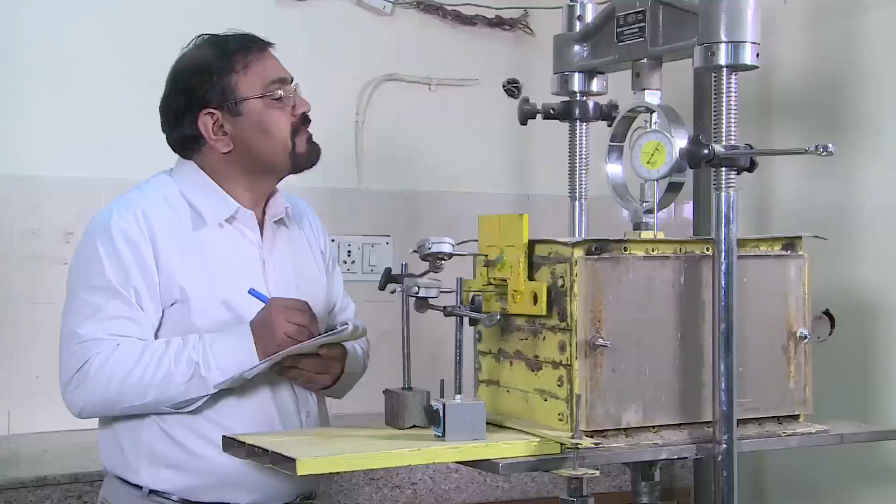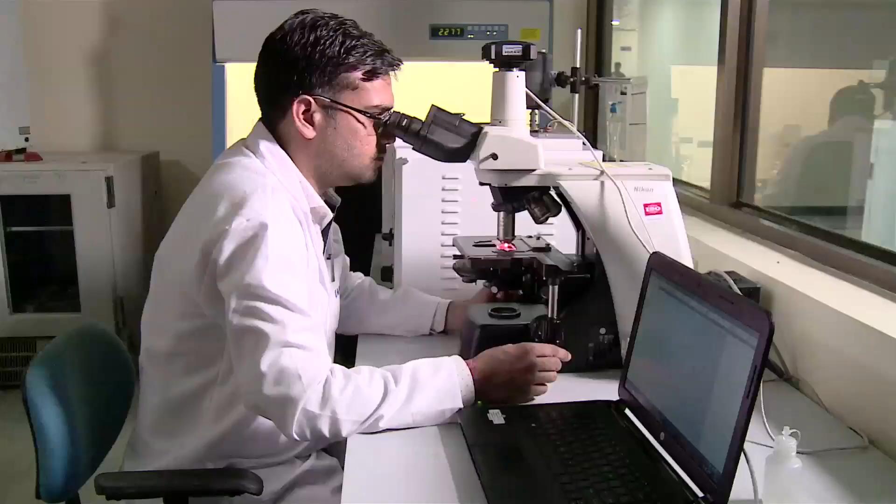To match pace with the advanced economies, it is very important for any nation to become science and technology sufficient. Keeping this in view, the Council of Scientific and Industrial Research, one of the premier scientific and industrial research organizations in the country, provided blueprints to establish a chain of research laboratories under its umbrella even before independence.

Central Road Research Institute, popularly known as CRRI, is one of these research laboratories, the genesis of which was thought of in the pre-independence period. The recommendation to establish Central Road Research Institute was accorded by the Industrial Research Planning Committee of CSIR in 1945. It was the efforts of Sir Shanti Swarup Bhatnagar, the then director of the Council of Scientific and Industrial Research.

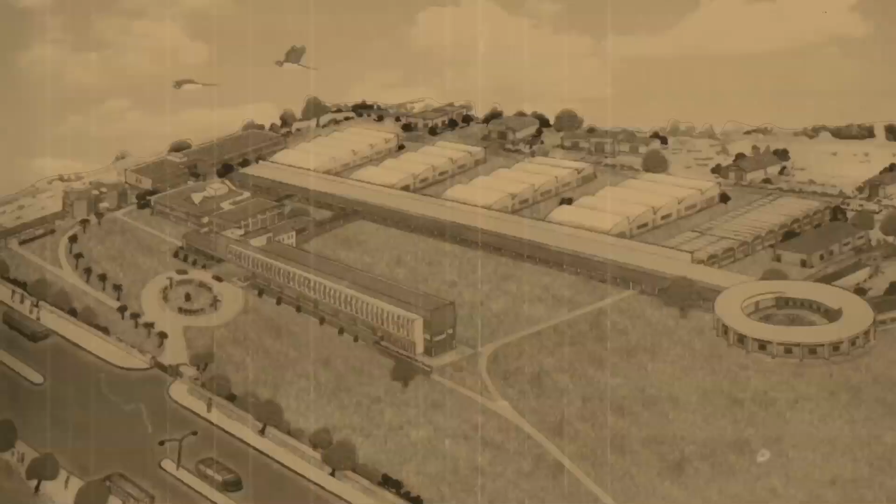And Mr. G.M. McElvey, consulting engineer to the Government of India, Roads, who suggested that the Central Road Research Institute be established in Delhi. Independence provided further impetus to this idea, and the Road Research Planning and Advisory Committee of CSIR considered the organizational and building requirements of the Central Road Research Institute, which was by then working in a temporary building.

Construction at the site of the present-day building at Mathura Road started way back in February 1951, with about 31 acres of land allotted to the laboratory. The building was inaugurated on the 16th of July 1952 by the then Prime Minister of the country, in the presence of scientific and political leadership, including Sir Shanti Swarup Bhatnagar and the founding director of CRRI.

Dr. Ernst Zipkes. CRRI was set up in 1950 with a mandate of conducting fundamental and applied research on highway materials. We have earned a reputation of being a solution provider to the field engineers on various problems being faced by them in the field. CRRI has taken up several projects of national importance in the past.

The Institute was the first to demonstrate the bulk utilization of fly ash in road construction. Quality control was also introduced by CRRI in 1962, and our scientists developed a mobile laboratory equipped with all facilities required for testing of material in the field.

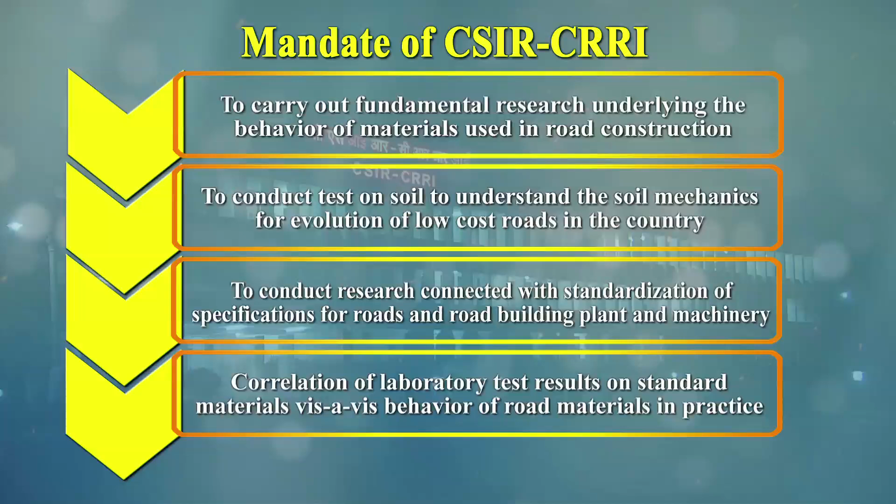CSIR CRRI was established with its mandate to carry out R&D activities in different research areas, which are well supported by infrastructural facilities and have been strengthened with the most modern equipment.

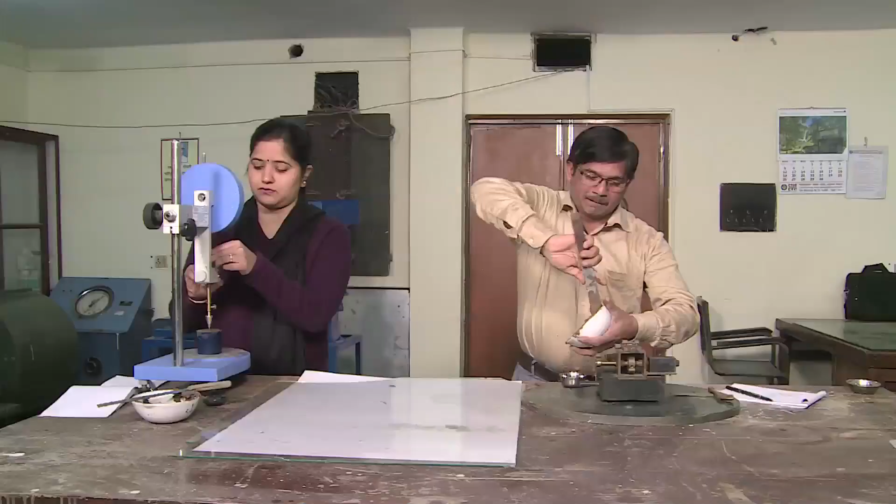This division is one of the oldest divisions of CRRI and has completed many complex and challenging projects sponsored by various agencies. Pioneering work was carried out regarding consolidation of marine clay deposits at various port areas of the country, and the efficacy of different ground improvement techniques was investigated.

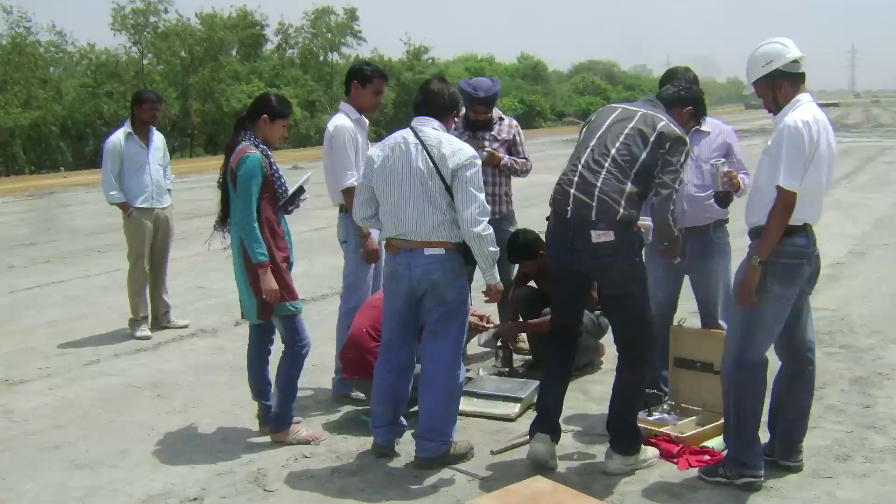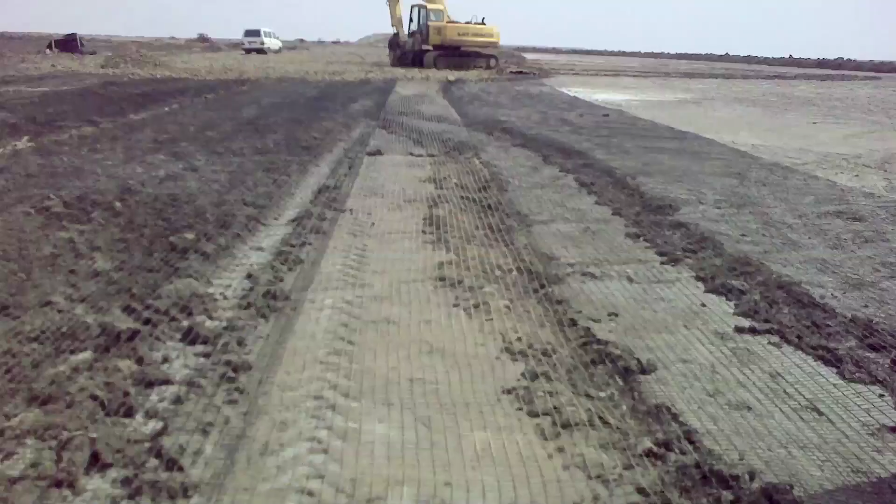Subsoil investigations and design of road embankments in strategically important areas have been done for different road construction agencies. The Geotechnical Engineering Division has been at the forefront to implement new technological developments like the use of geosynthetics, reinforced soil construction, etc.

In the recent past, R&D projects on soil nailing for implementing the box pushing technique for underpass construction, and failure analysis of reinforced approach embankments, have received special attention.

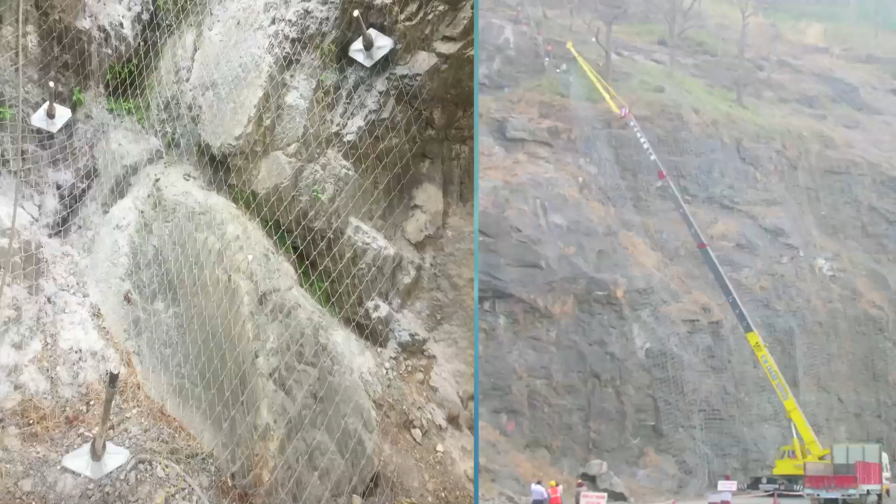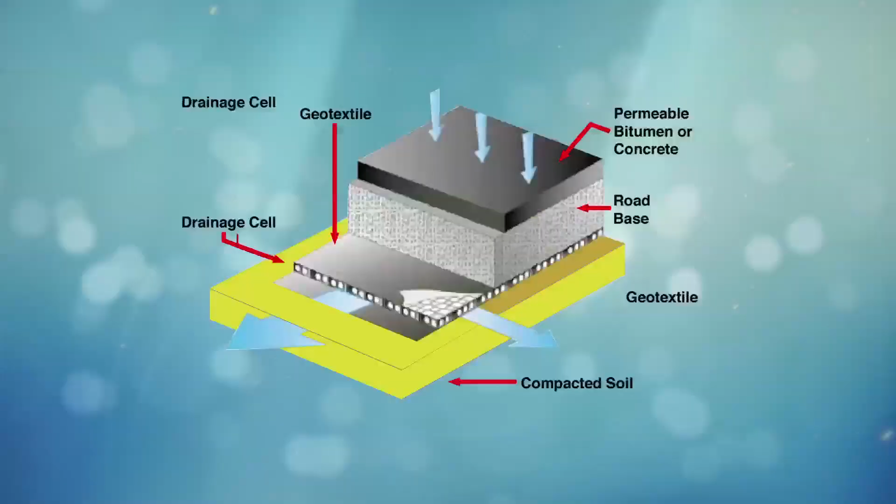This division has carried out extensive work on mitigation of landslides and management of hill slopes adjacent to roadways in mountainous areas. Some of the noteworthy contributions of CRRI include landslide and rockfall mitigation measures on the Mumbai-Pune Expressway, Zirakpur-Parwanoo Road, R&D on subsurface drainage technique, asphalt mulch technique, and use of coir or jute netting to prevent shallow landslides.

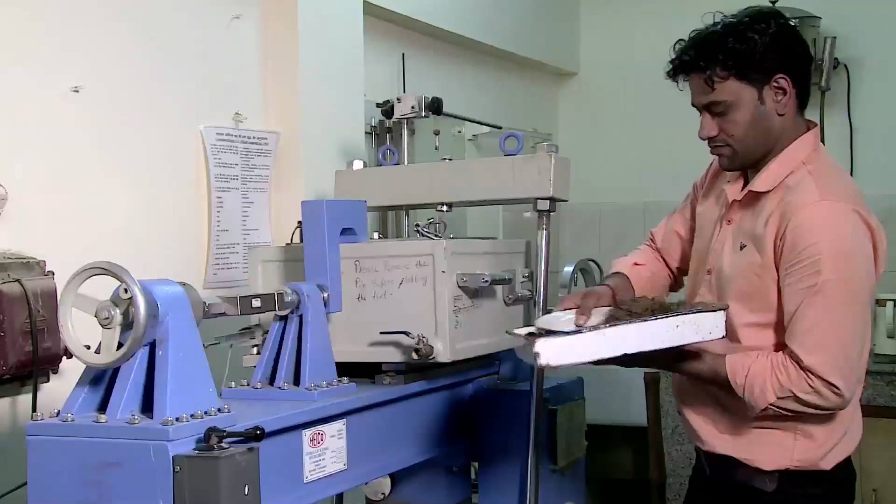The division has developed expertise on use of waste and marginal materials in roadworks. Extensive characterization and mechanical and chemical admixture stabilization of various waste materials like fly ash, copper slag, zinc slag, municipal wastes, jarofix has been done, and methodologies for utilizing these materials in roadworks have been developed.

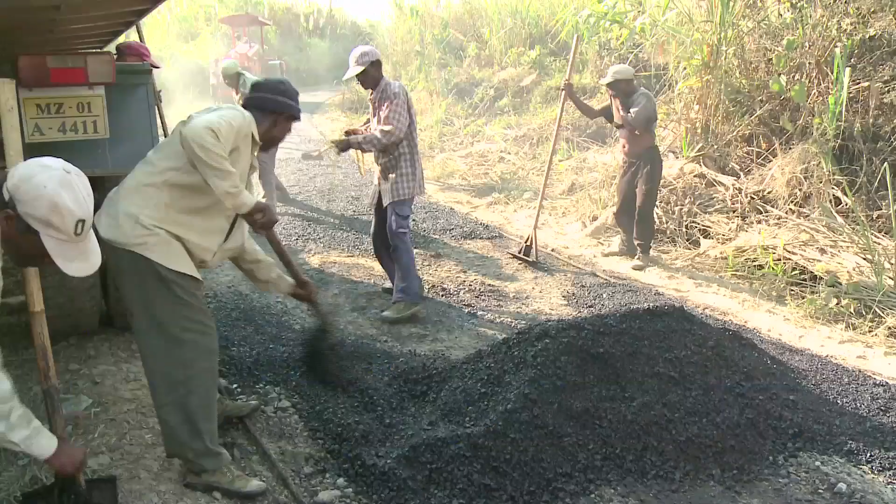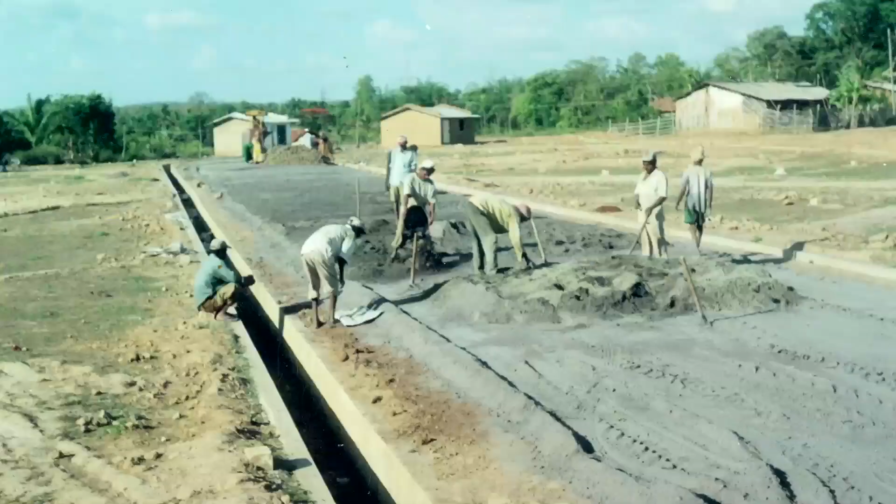Recently, this division has prepared a database of waste and marginal materials available in selected areas of the country on a GIS platform. This division has been acting as a specialist consultant and solution developer for the road construction industry in the area of geotechnical engineering, especially for subsoil problems, drainage and roadside slope-related issues, and waste and marginal materials.

In association with the Indian Roads Congress and Bureau of Indian Standards, it has contributed significantly towards formulation of several national codes of practice and guidelines. The R&D achievements of the Geotechnical Engineering Division have been well recognized through many awards received over the years.

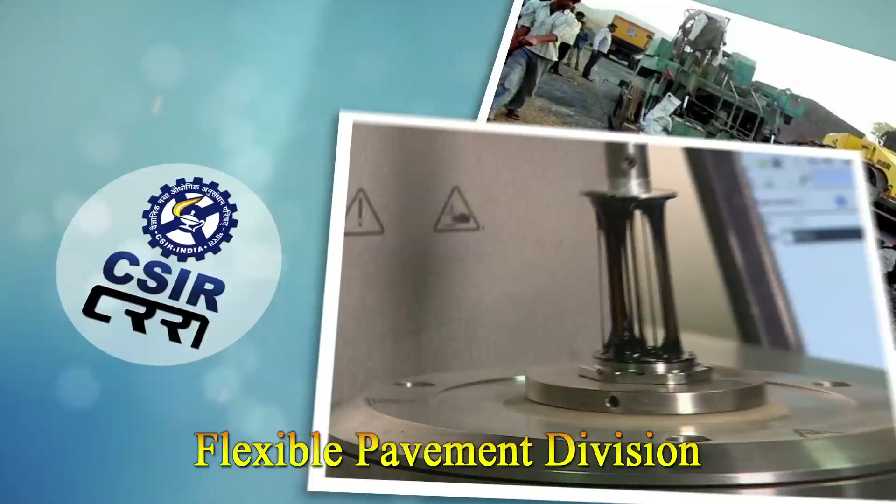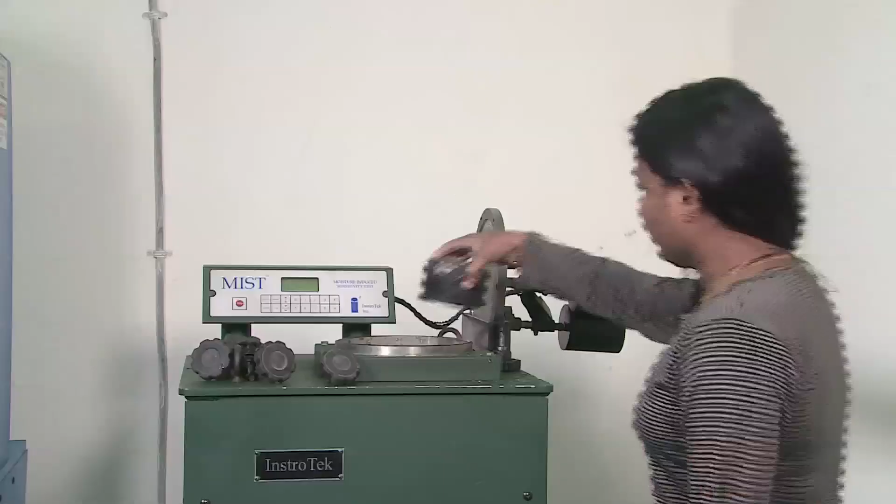The Flexible Pavement Division of the Institute is involved in research in the area of bituminous materials, their testing and evaluation. Research in bituminous pavement design, its failure investigations, design of overlay, recycling of bituminous pavements, warm mixes, etc. are carried out by the division.

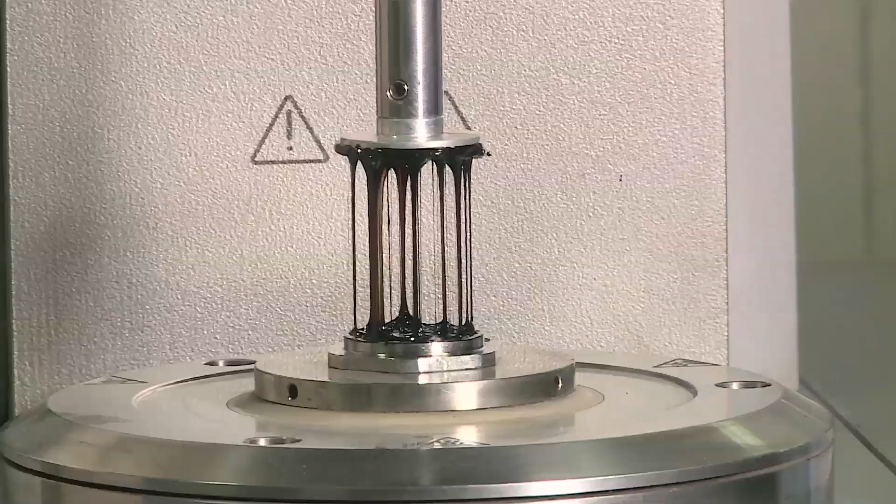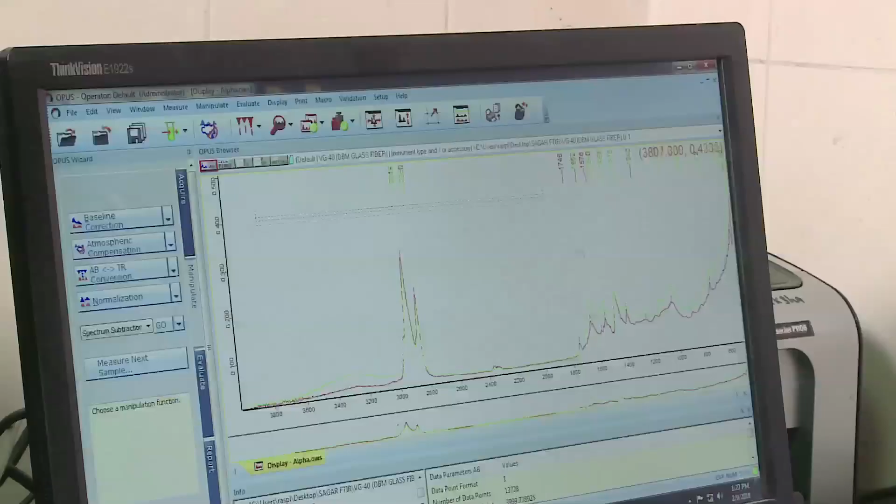The division has developed national guidelines for design of flexible pavement overlay using the Benkelman beam deflection method. Research has been carried out on use of polymer and rubber modified bitumen, multigrade bitumen, and guidelines have also been developed for use of appropriate grade of bitumen in different climate regions of the country. Laboratory evaluation and field demonstration have been carried out for use of waste plastic in bituminous roads.

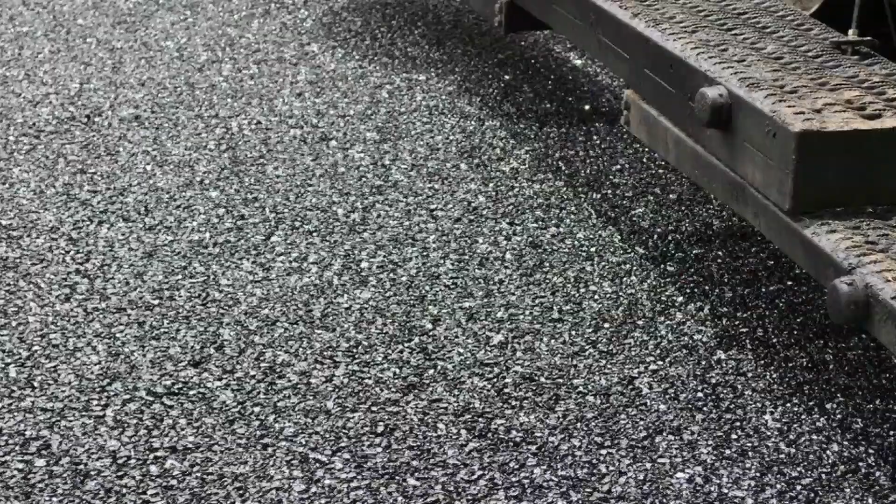R&D activities on use of recycled asphalt pavement and design and performance of microsurfacing for bituminous pavement have also been carried out in the division. The division is also engaged in designing and performance of stone matrix asphalt and use of cold mix technology for bituminous pavements. The division has acquired various testing facilities for flexible pavement.

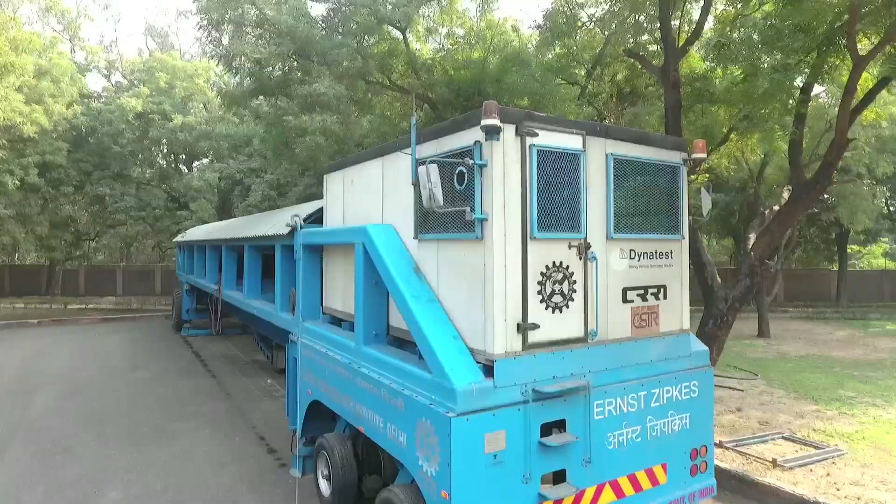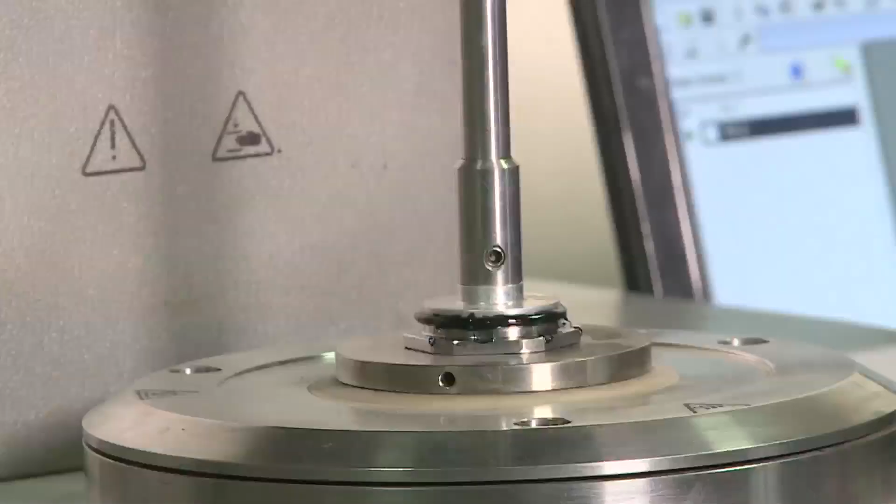Accelerated Pavement Testing Facility is used to get the long-term performance evaluation of the pavement. Universal Testing Machine is used to assess the strength properties of bituminous mixes and ascertain their behavior in the field. The division has facilities to evaluate resilient modulus, fatigue life, and indirect tensile strength of bituminous mixes. Dynamic shear rheometer checks the viscoelastic properties of bitumen at different temperatures.

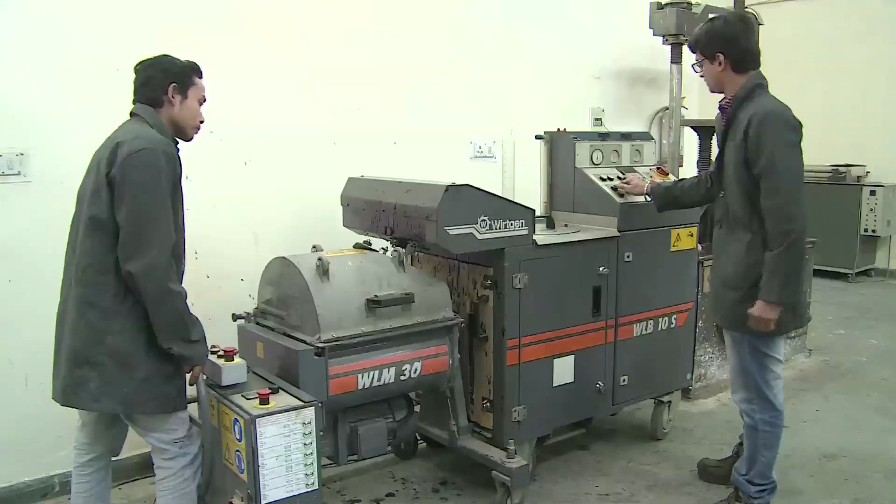Research work at the division is carried out to use reclaimed materials either in the bituminous layer or in the granular layer for recycling of pavement. CRRI has recently developed a pothole repairing machine which can be transported to the site to repair the pothole instantaneously.

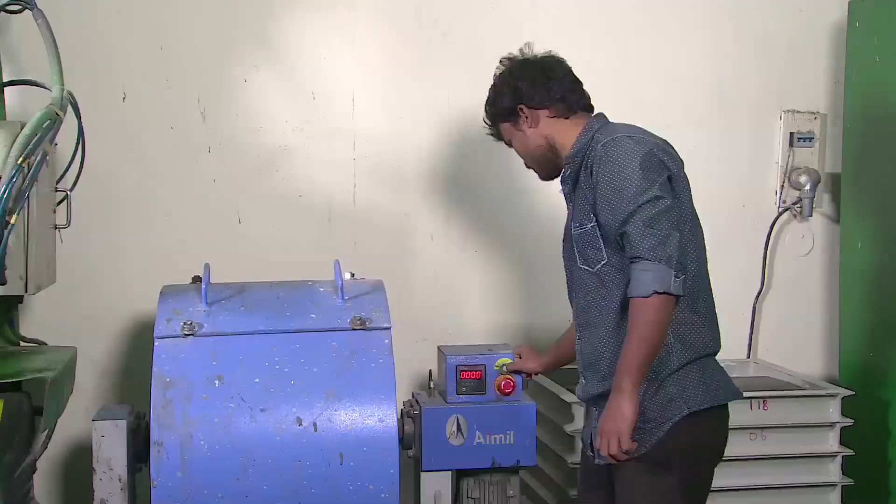The division is also associated with various agencies like NHAI, NRRDA, PWDs and border roads to provide consultancy services and to provide technical guidance for their problems. The division has received the CSIR Technology Award 2017 for the use of sustainable cold mix technology for bituminous road construction, and has contributed to the development of IRC and BIS codes.

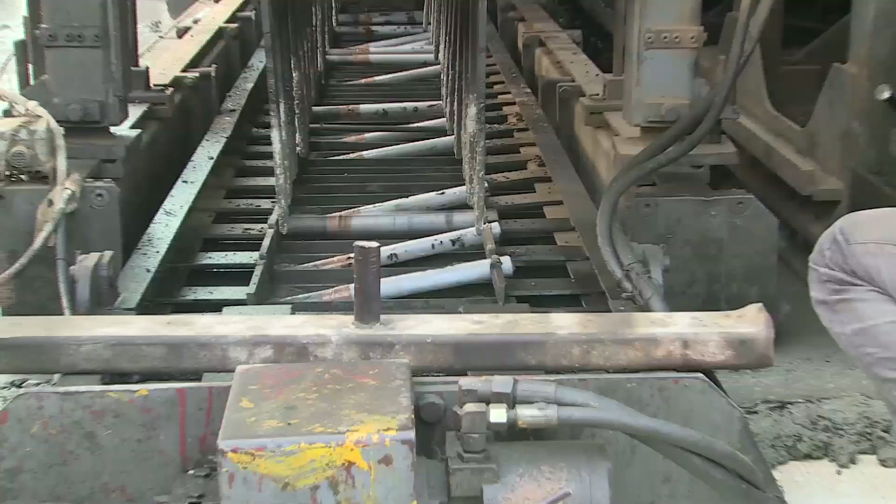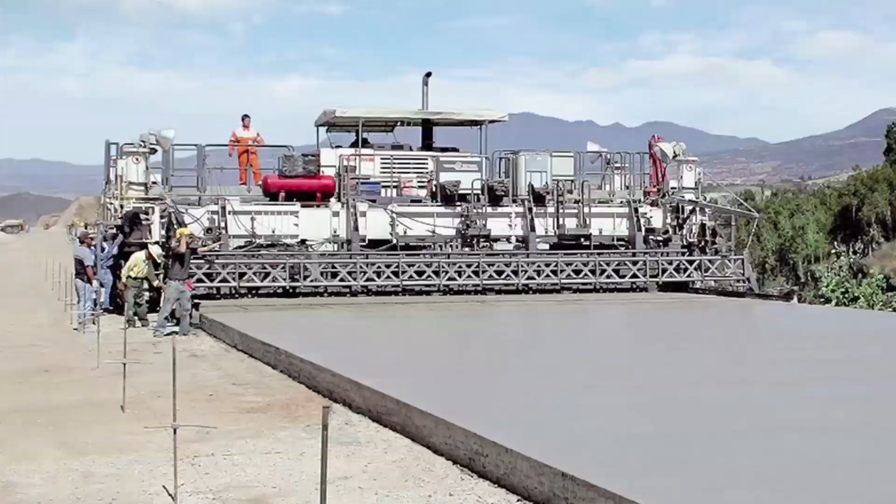The Rigid Pavement Division is involved in activities related to design, construction, evaluation and maintenance of jointed plain concrete pavement (JPCP), continuously reinforced concrete pavement (CRCP), white topping and other forms of rigid pavements, utilization of industrial wastes and byproducts in concrete road construction, instrumentation of rigid pavements, investigation of causes of distresses or failure and taking remedial measures, etc. The division has also contributed to the development of many IRC and BIS codes.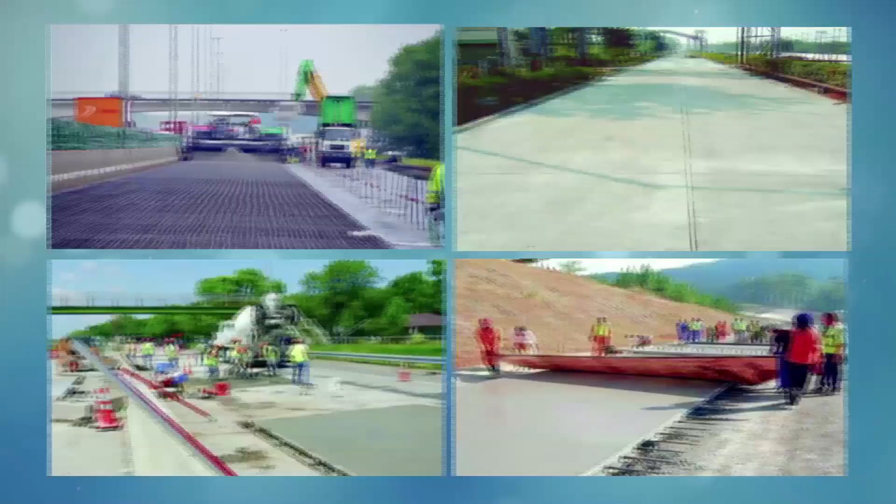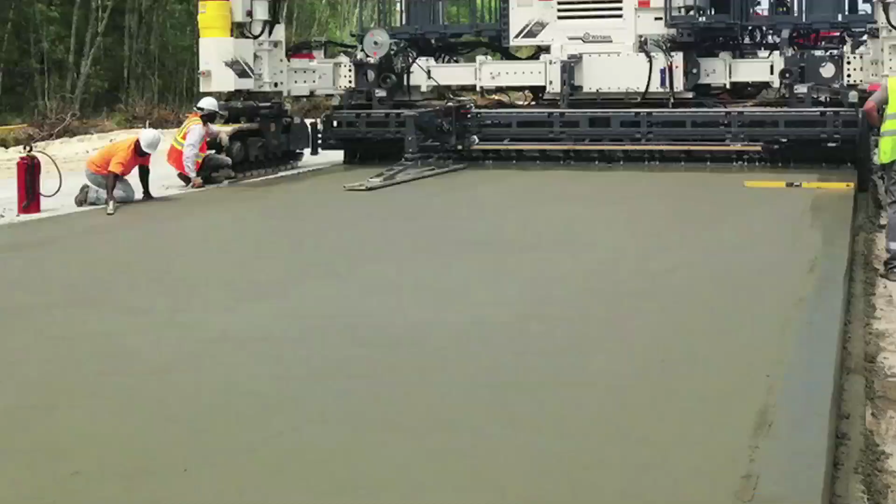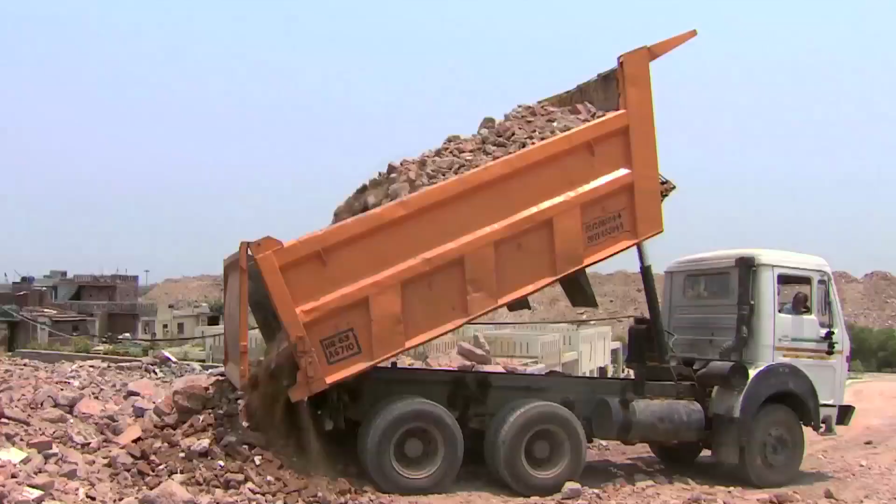Some of its landmark studies consist of utilization of high-volume fly ash concrete (HVFAC) for rigid pavement, white topping using high-performance concrete mixes for rehabilitation of existing asphalt pavement, roller compacted concrete pavement, use of synthetic fibers in concrete, use of industrial byproducts like fly ash, slags, marble slurry dust in concrete mixes, sand stabilization with magnesium oxychloride cement, utilization of copper and zinc slag as fine aggregates in concrete mixes, investigation and remedial measures for distressed concrete pavements, and utilization of recycled concrete aggregate and C&D waste for construction of concrete pavements.

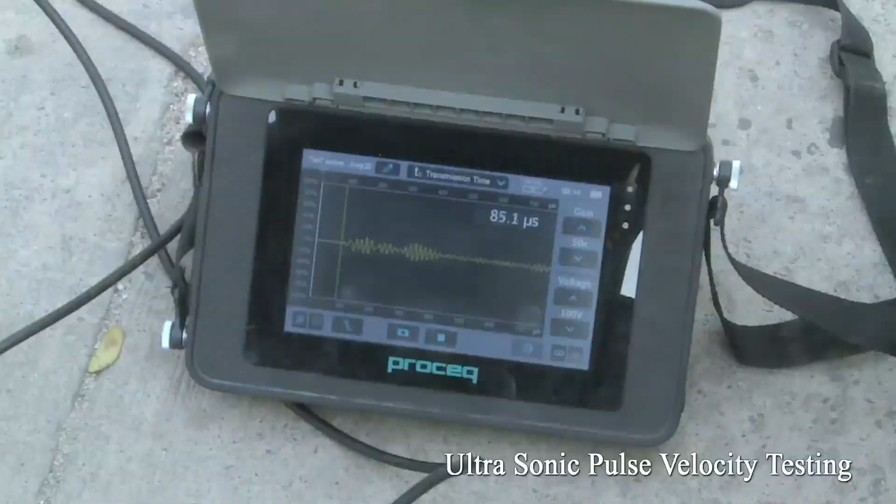The division is equipped with the most modern facilities needed for this purpose, such as universal testing machine, compression testing machine, concrete abrasion testing machine, concrete impact testing machine, diamond cutting machine, British pendulum tester, ultrasonic pulse velocity testing apparatus, and LOK and CAPO.

The major thrust areas of the Pavement Evaluation Division comprise pavement performance studies, structural and functional evaluation of highway and airport pavements, rehabilitation design of pavements, pavement deterioration modeling, pavement maintenance management system, road inventory and condition monitoring for road asset management, investigation of causes of distress or failures and needed remedial measures, and axle load studies for planning of maintenance and repair strategies.

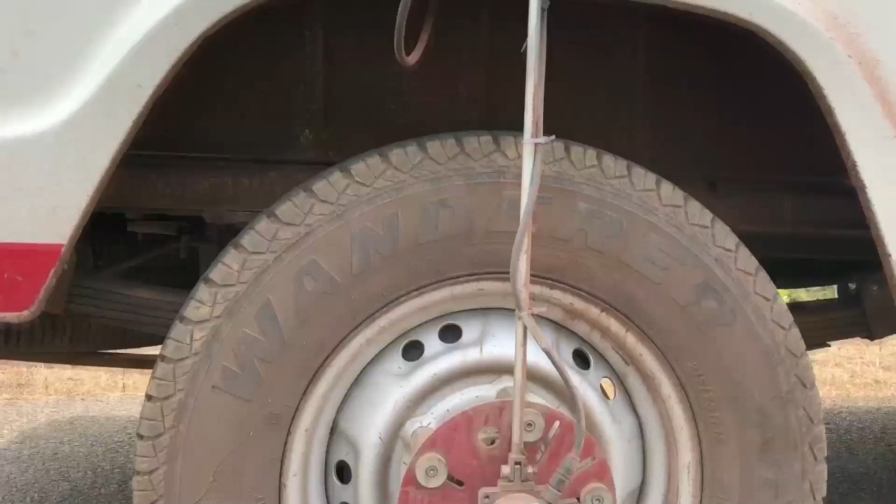CSIR-CRRI has successfully employed a state-of-the-art facility, namely Automated Road Survey System (ARSS), for conducting automatic road inventory and pavement condition survey throughout the country. This technology has been successfully used for the first time by CRRI under various research studies.

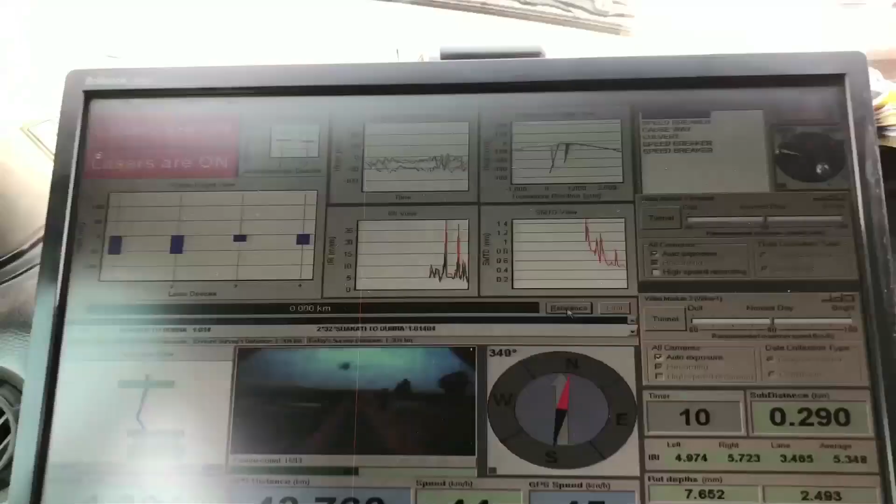Based on the latest techniques, ARSS utilizes laser technologies, differential global positioning system (DGPS), and video image processing tools, etc., and is capable of collecting field data automatically at traffic flow speed ranging from 30 km per hour to 100 km per hour. The falling weight deflectometer is used to evaluate the structural conditions of pavement.

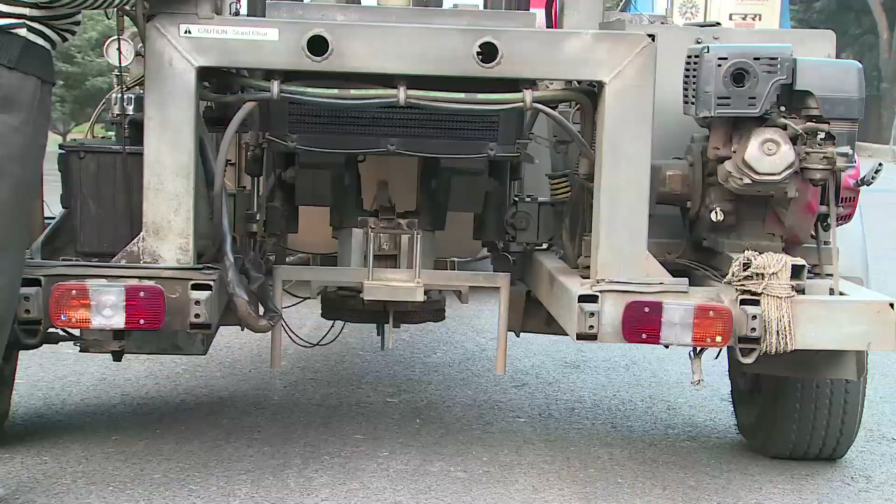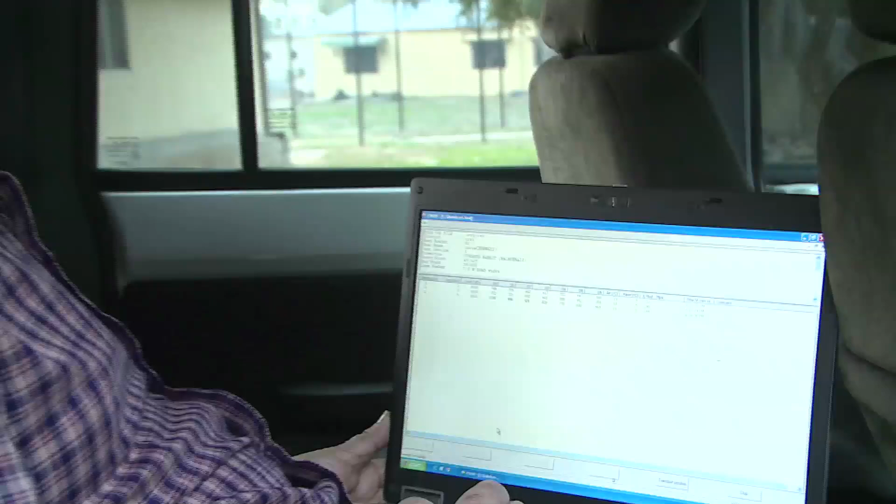The FWD is designed to impart a load pulse to the pavement surface, which simulates the load produced by a rolling vehicle wheel. FWD data is most often used to calculate stiffness-related parameters of a pavement structure.

Fifth Wheel Bump Integrator is indigenously developed by CSIR-CRRI and is used for roughness measurement of pavements. It is towed by a jeep at a constant speed of 32 km per hour. The walking profiler is a precision instrument designed to collect road surface profile data, and the dipstick is used to accurately assess the characteristics and quality of any continuous paved surface.

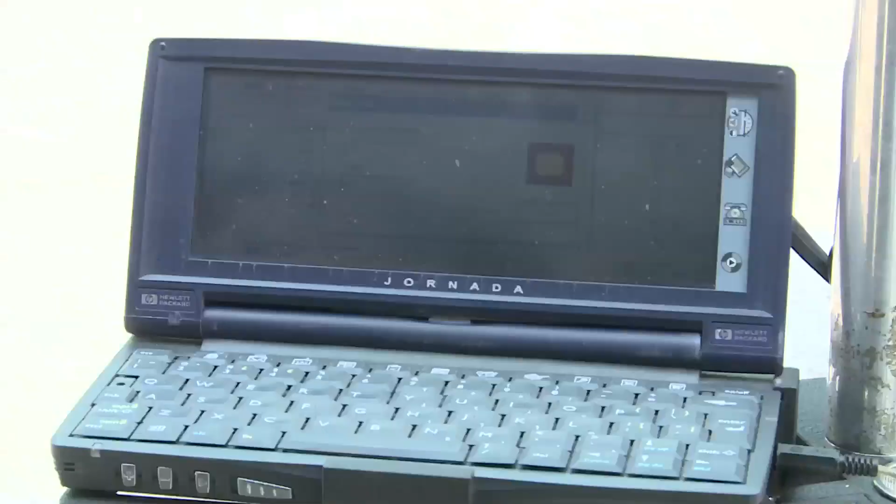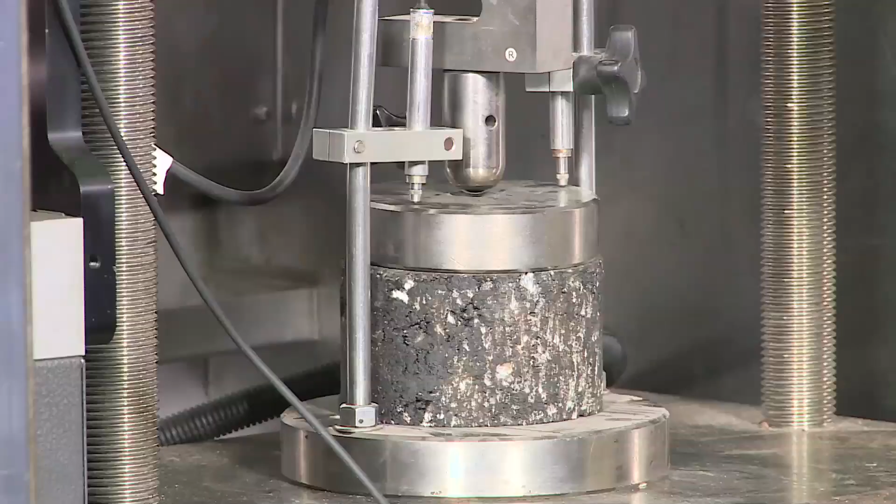The Institute has facilities for various performance testing on hot bituminous mixes. It uses a high-precision servo-pneumatic valve in conjunction with a low-friction actuator and sophisticated data acquisition, which results in finding out the performance of hot bituminous mixes.

In addition, the flexural fatigue test is used to characterize the fatigue life of hot bituminous mixes at intermediate pavement operating temperatures. It provides estimation of fatigue life of a bituminous layer under repeated traffic loading that causes fatigue failures. These failures ultimately result in fatigue cracking, which will cause disintegration of the pavement if not maintained in time. The Institute has also acquired the Asphalt Mixture Performance Tester, Steel Roller Compactor, and Bitumen Mixture Mixer.

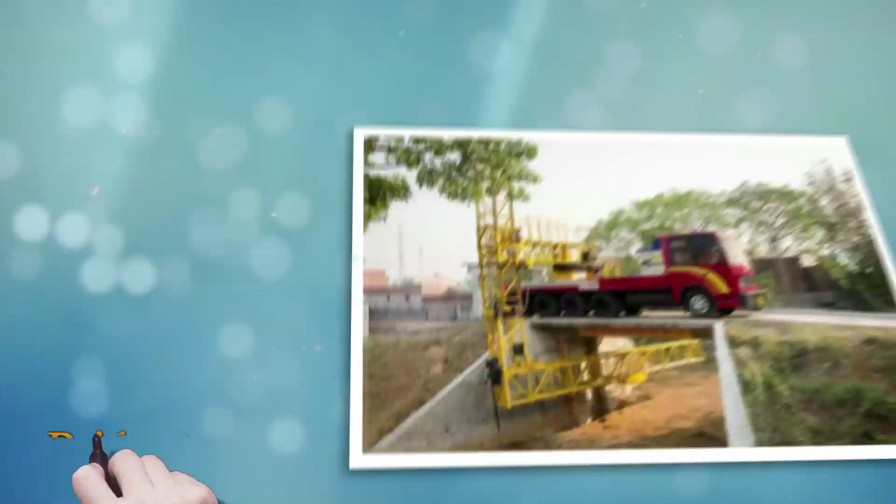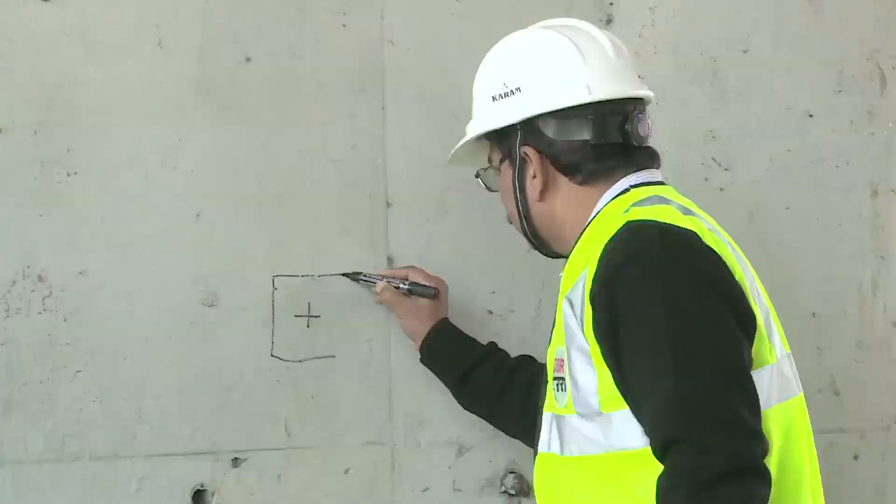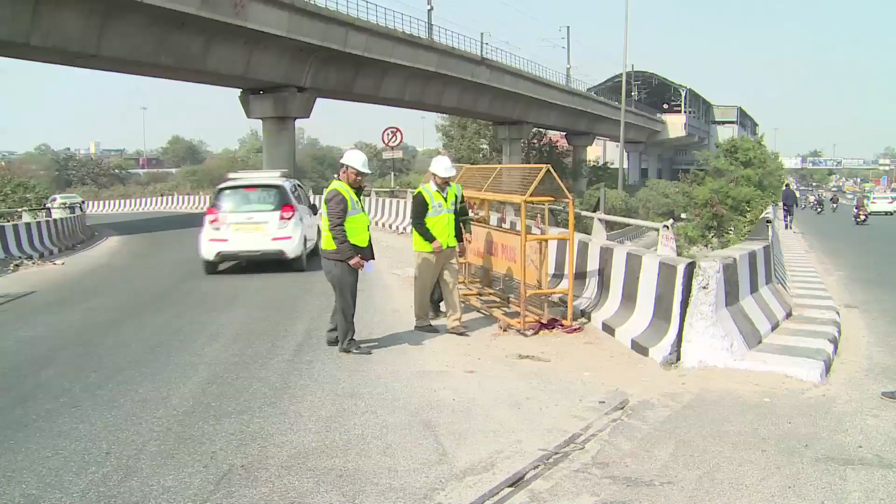Distress diagnostics of distressed bridges using non-destructive testing (NDT) has been the core strength of Bridge Engineering and Structures Division at CSIR-CRRI. The division carries out R&D activities related to all aspects of bridge engineering, including construction, distress diagnostics, vibration studies, rehabilitation, management of highways and railway bridges and other civil engineering structures, testing of expansion joints, fatigue studies of bridge components, wind tunnel studies on large span bridges and other high-rise structures, load characterization for design and aerodynamic studies.

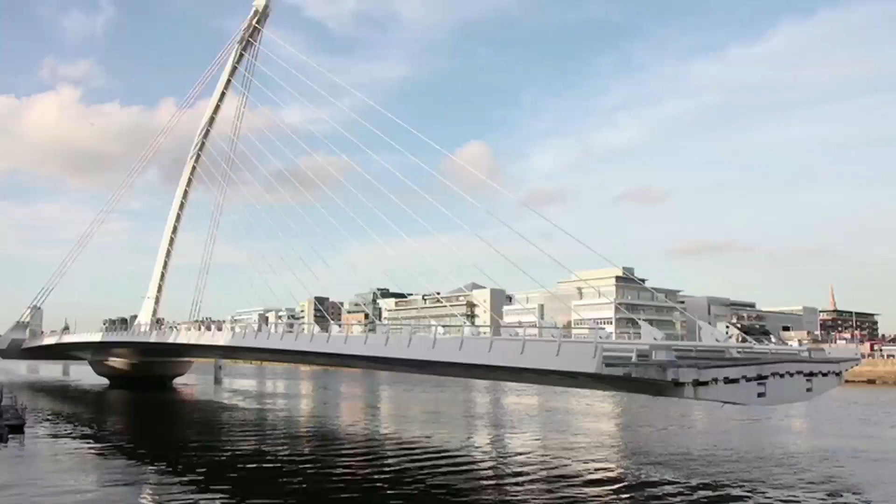The division has state-of-the-art NDT experimental facilities such as Schmidt's rebound hammer, ultrasonic pulse velocity tester, cover meter, impact echo tester, rapid chloride penetration tester, Galva pulse corrosion measuring equipment, and core cutting equipment.

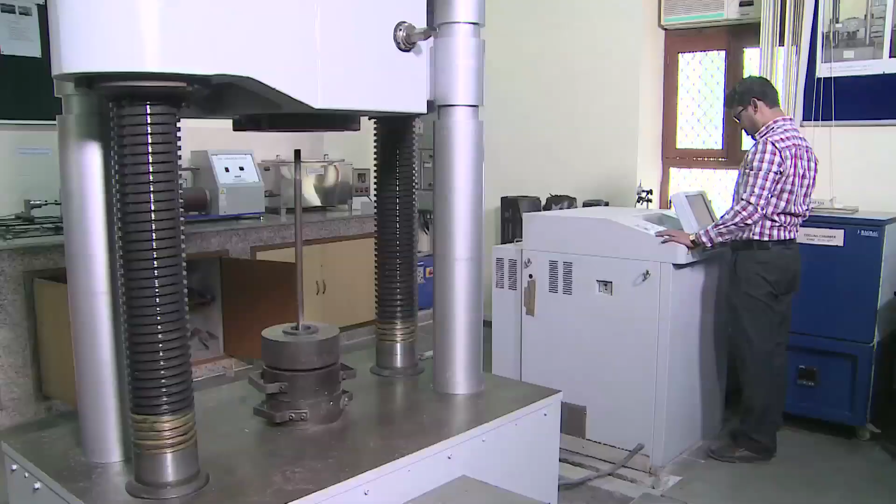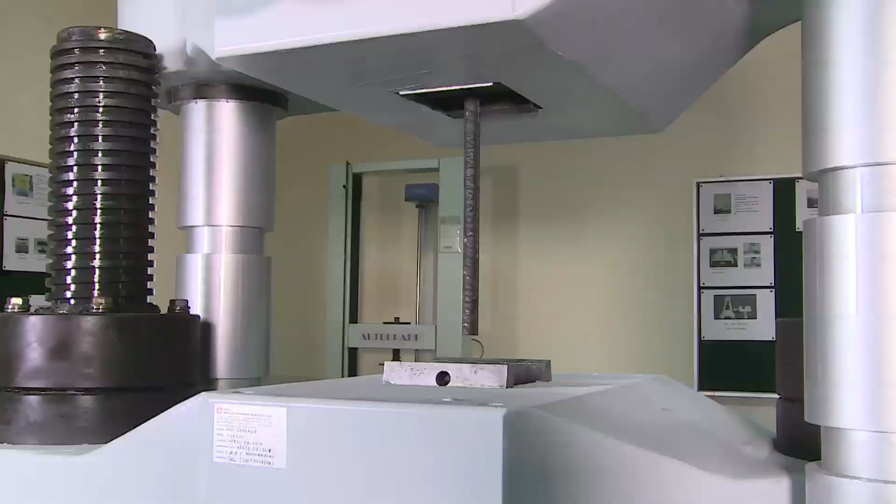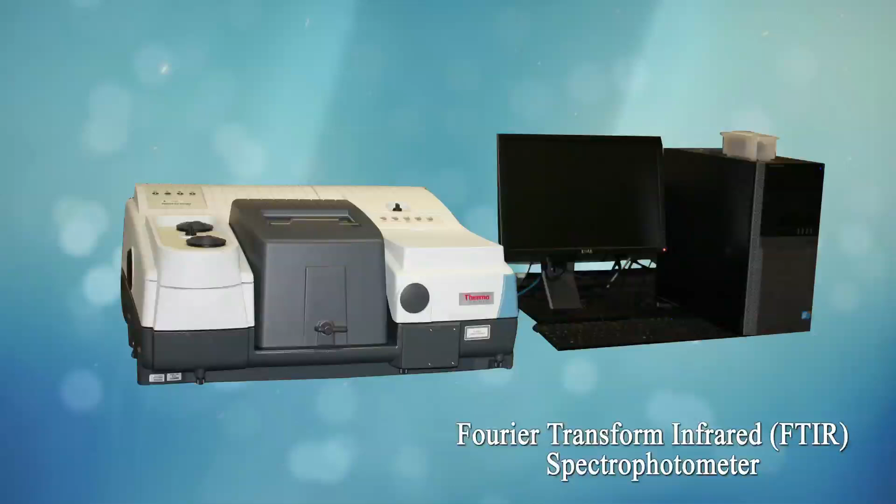The division has experimental facilities for the evaluation of material and structural properties of concrete, steel, and elastomeric materials. The unique testing facilities include a 2000 kilonewton Universal Testing Machine (UTM), 5 kilonewton Autograph UTM, ozone testing chamber, humidity testing chamber, and Fourier Transform Infrared (FTIR) spectrophotometer.

Health monitoring of bridges using advanced instrumentation techniques has been one of the major thrust areas for R&D activities.

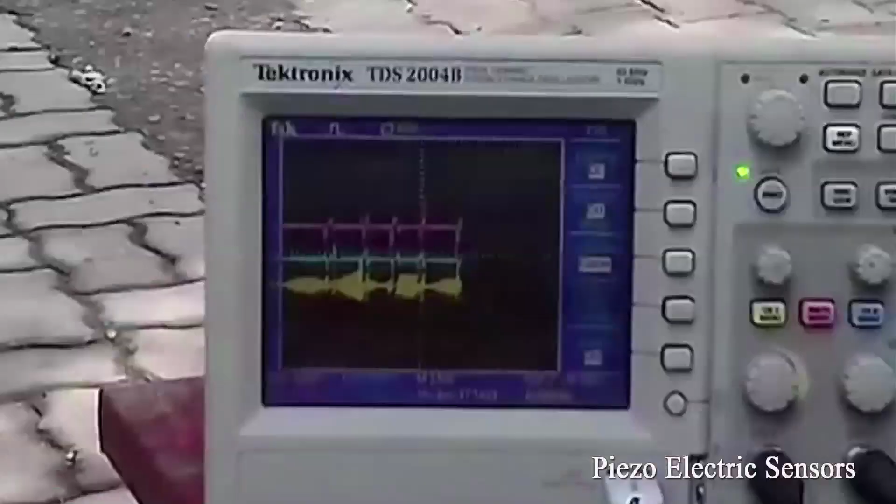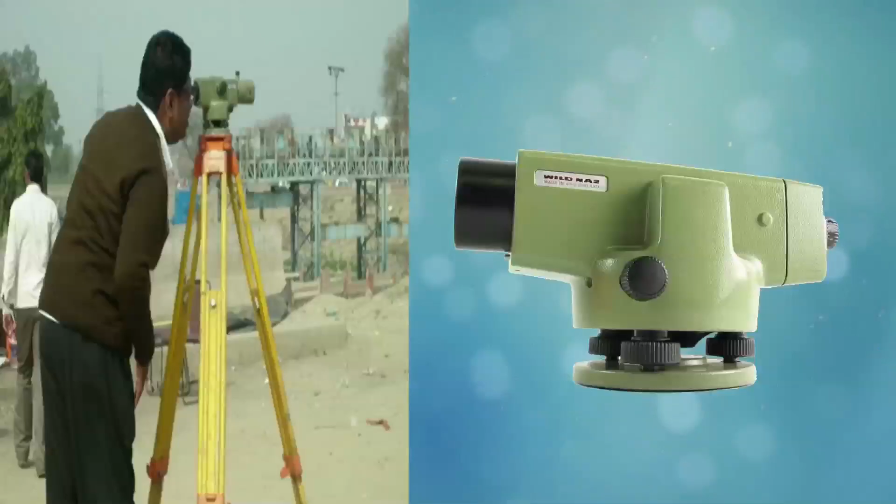The division has facilities to experimentally evaluate strains, deflections and vibrations using vibrating wire strain gauges, temperature sensors, load cells, earth pressure sensors, piezoelectric sensors, accelerometers, fast Fourier transform (FFT) analyzer, static and dynamic data loggers, impedance analyzer, resistivity measuring corrosion sensors, and NA2 precision leveling equipment.

The division has expertise and facilities for assessment of structural condition of bridges using mobile bridge inspection unit and load testing. It also has facilities for the evaluation of elastomeric bearings and is engaged in the development of comprehensive testing facilities for bridge expansion joints.

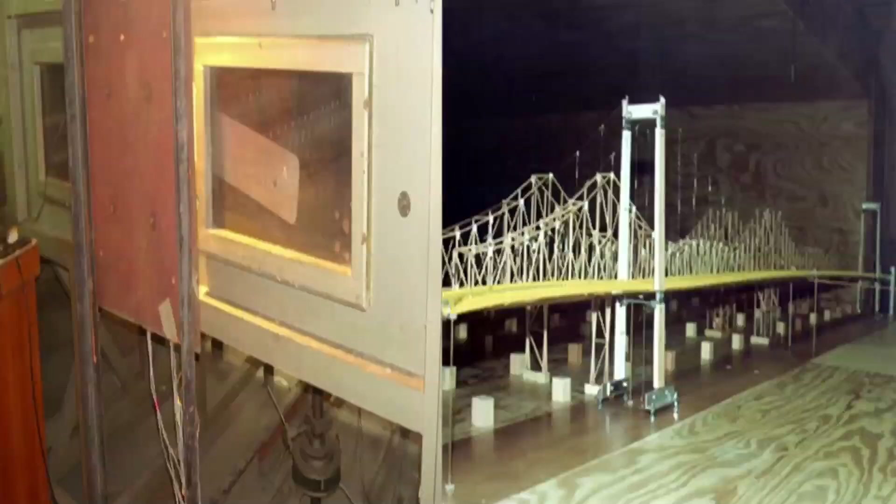The division has a unique model-type industrial wind tunnel for carrying out wind tunnel investigations for large span and high-rise structures such as cable-stayed bridges, cable suspension bridges, extra-dosed bridges, cooling towers, and chimneys.

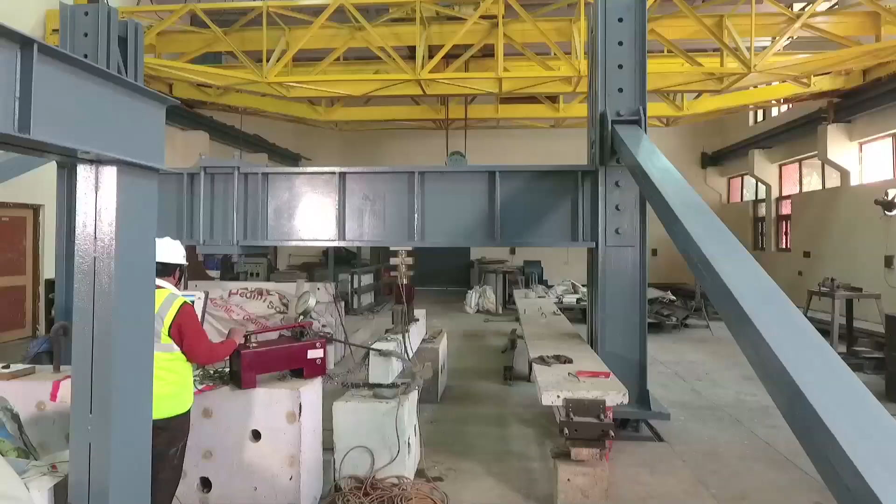In addition, the division has the expertise for designing and evaluating various rehabilitation schemes such as plate bonding, external pre-stressing, and epoxy grouting. The technology developed at CRRI has been transferred to industry for social benefits.

The Traffic Engineering and Safety Division carries out work in developing traffic management systems and strategies for urban roads and highways, design of transport infrastructure, assessment of capacity of roadway facilities, ridership estimation for metro systems, and imparting knowledge to practicing engineers and traffic police in understanding traffic management and its applicability for Indian conditions.

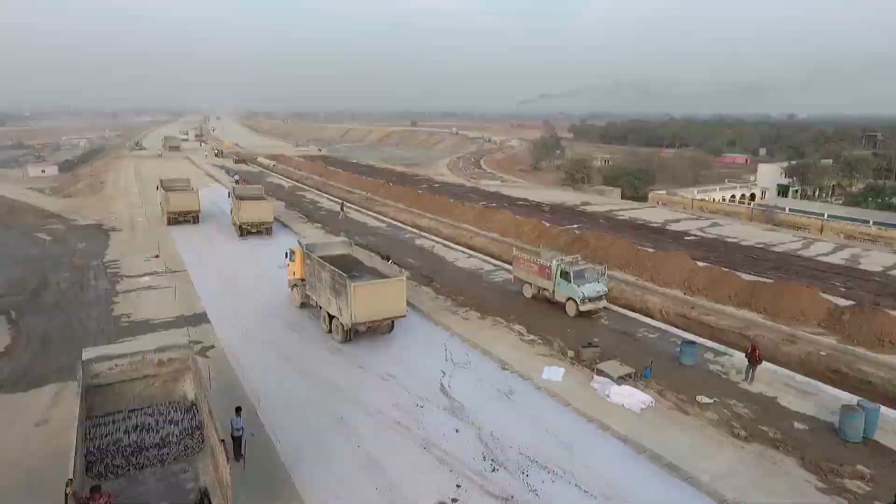The division conducts Road Safety Audit (RSA) at different stages of road development and operation, aimed at mitigating safety problems and reducing rising road crashes, for suggesting appropriate aesthetic and safety improvements to roads and highways.

The first ever Indian Highway Capacity Manual, known as Indo-HCM, was developed by CRRI and released by the Minister of Road Transport and Highways, Shipping and Water Resources on the 12th of February 2018. The manual is based on an extensive countrywide study of traffic characteristics, covering different types of inter-urban and urban roads separately, including controlled and uncontrolled intersections, coupled with addressing the capacity and level of service for pedestrian facilities.

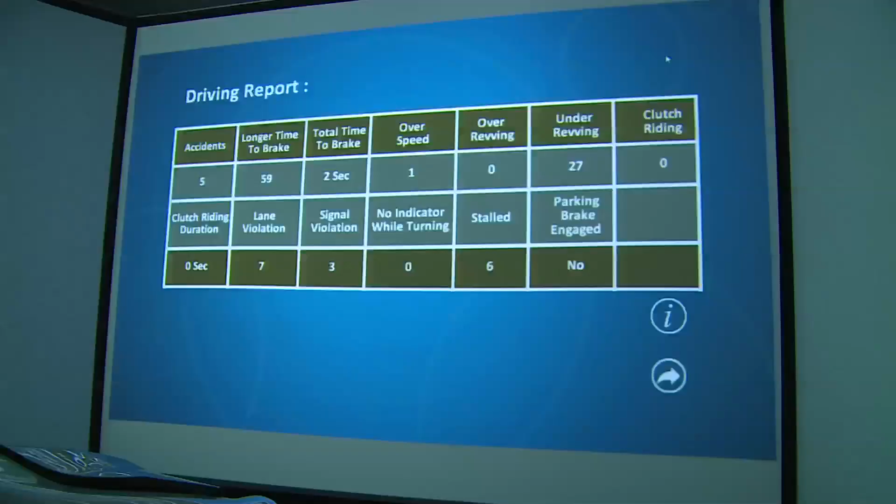A car driving simulator has been indigenously developed at CRRI to check drivers' good and bad practices along with their tolerance capacity to outside challenges and hazards. It provides data on the speed of self and fellow drivers and also records drivers' responses while facing any emergency on the road. The car driving simulator also has essential psychomotor tests required for the assessment of driving traits like reaction time.

These include speed and distance judgment, road knowledge test, reactive stress tolerance test, visual acuity and glare test, Vienna test, and hand grip test. These tests have been successfully conducted on drivers of the Special Protection Group as well.

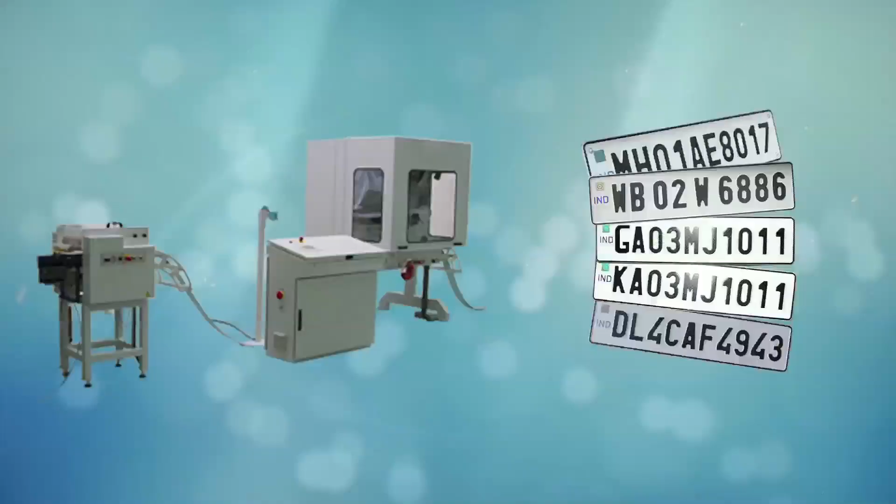Type Approval Certificate and Conformity of Production (COP) for high security registration plates by CRRI has immensely contributed and helped the Ministry of Road Transport and Highways in formulation of specifications for HSRP for motor vehicles in India. The Ministry has approved CRRI as one of the testing and approving agencies for manufacturers of high security registration plates in India.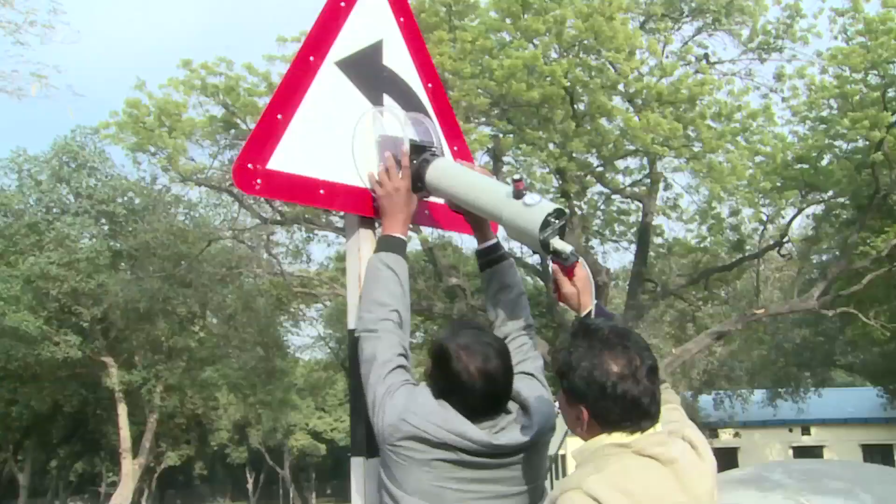The division is also engaged in disseminating new technologies to PWD engineers and other user agencies and consultants by organizing training programs on road safety and geospatial technologies.

The Traffic and Transportation Planning Division aims to promote R&D and consultancy in the area of transport systems planning, GIS, and transportation economics. The major objectives are to introduce new innovative approaches for sustainable road infrastructure and evolving policies for sustainable road and transportation systems planning, especially in public transportation and non-motorized transport.

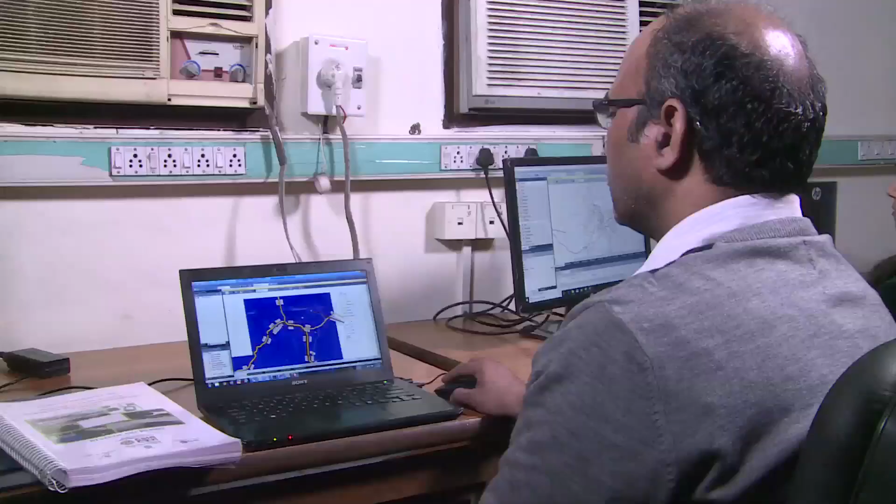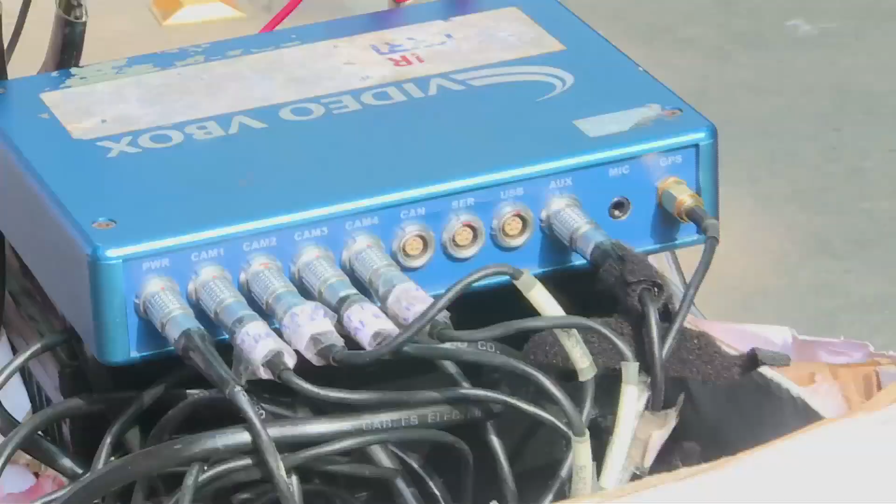The division has state-of-the-art software facilities for travel demand modeling, microscopic traffic simulation, highway geometric design, image processing, statistical and mathematical modeling, laser-based speed measurement devices, video V-box, vehicle-based road asset management system, and noise and vibration measurement equipment.

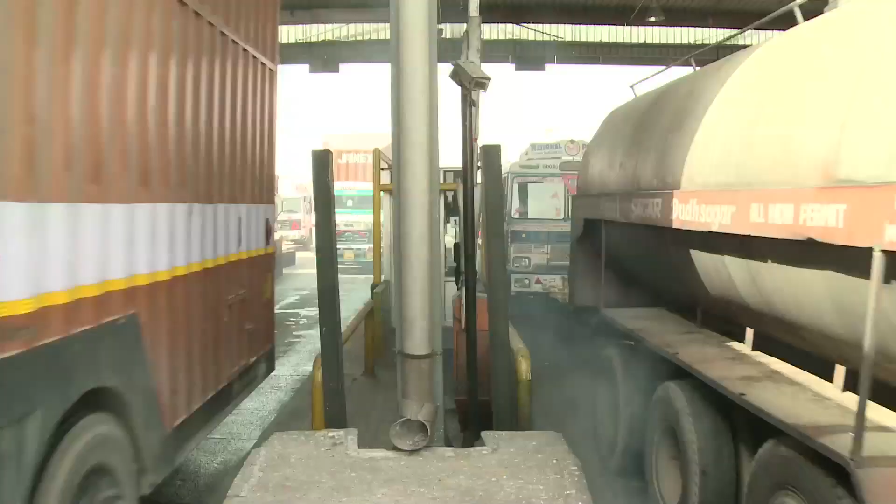Significant work has been carried out on urban road traffic and air pollution in major metropolitan cities of India, ridership estimates and economic evaluation of metro rail, especially in Delhi, Ludhiana and Ahmedabad, noise and vibration studies along various metro rails in Delhi, Kolkata, Mumbai, Pune, Hyderabad and other elevated roads and flyovers, geometric design for high-altitude areas, freight demand estimation for iron ore mining areas, and development of guidelines for sustainable transportation systems.

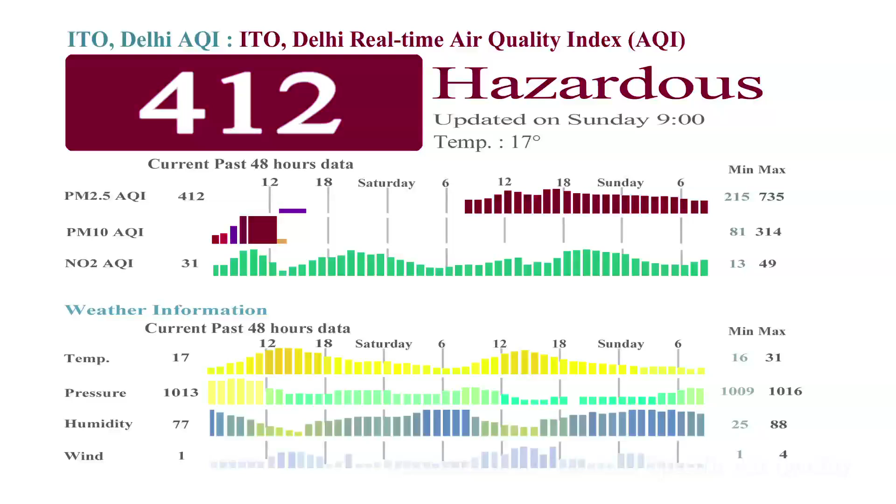The division also handles research on environmental pollution due to road traffic. The major activities include detection of environmental pollutants, assessment of pollutant-specific air quality especially in metropolitan cities, and also vehicle exposure to volatile organic compounds, carbon monoxide, black carbon, including its probable health impact on commuters.

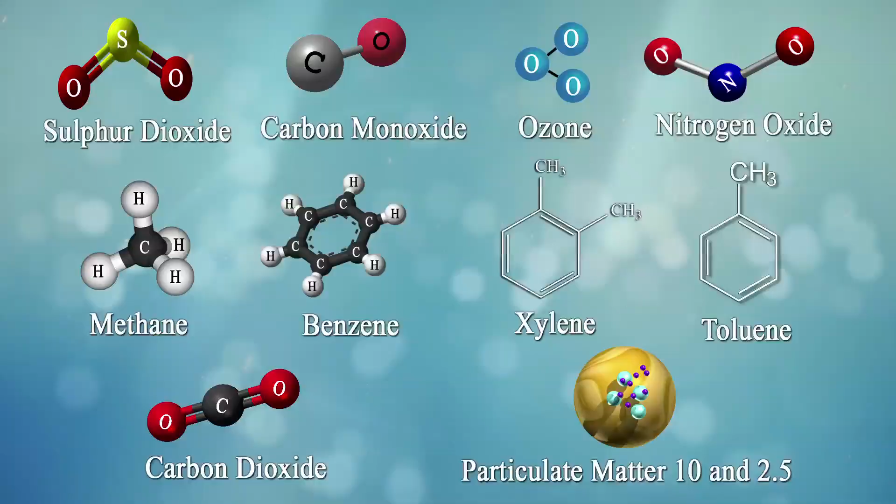The division is also associated with fuel consumption and emission studies in real-world conditions. The institute has a state-of-the-art mobile air pollution monitoring van fitted with required sensors to assess environmental pollutants. This monitoring van is extremely useful in the concurrent analysis of both vehicle emissions and ambient air quality, giving both spatial and temporal pollution variation data.

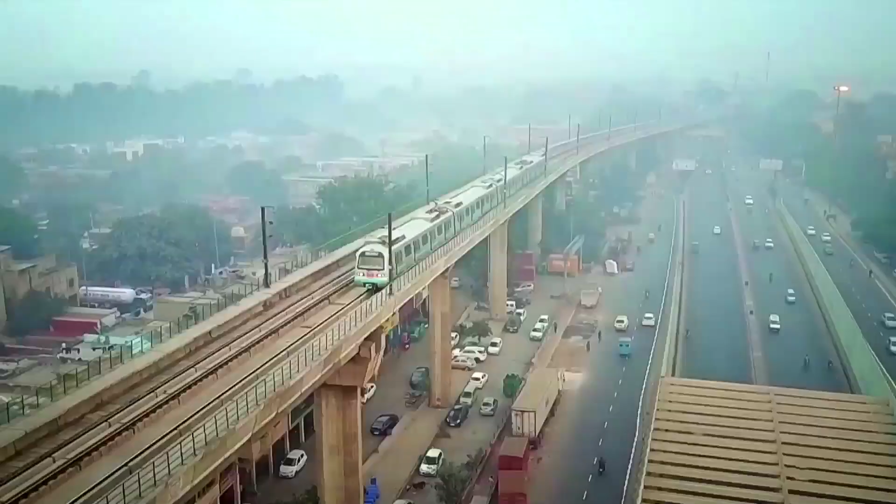The major studies conducted in this area include study of atmospheric aerosols and trace gases for the Delhi-Hyderabad corridor, environmental impact assessment studies for Delhi Metro, and traffic and transportation studies and air quality assessment studies and assessment of pollution on the Mathura-Agra corridor for Mathura refinery, etc.

CRRI is the first institute in the country which undertook studies on real-world on-road vehicle emission measurement for different types of fuel and to measure vehicle emissions in actual driving conditions.

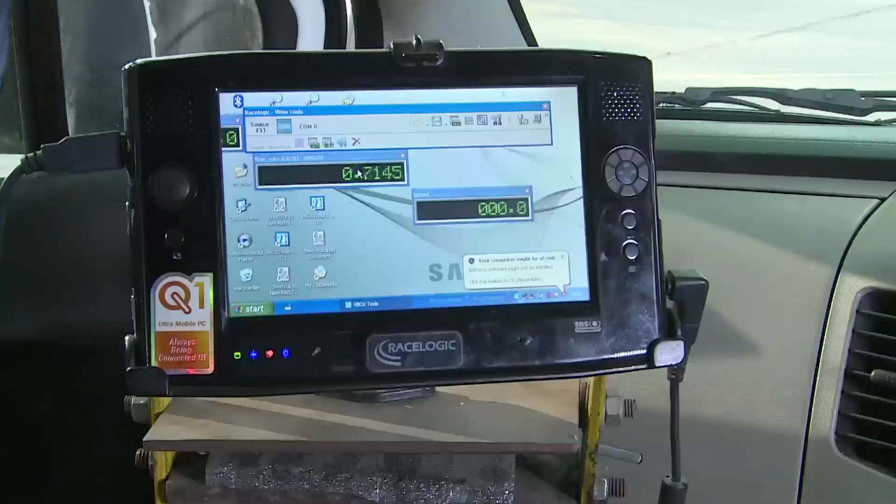The division has facility for testing fuel consumption. This test facility measures, records and stores fuel flow data using direct measurement method, vehicle speed, engine RPM, and other in-vehicle parameters for different categories of in-use petrol and diesel vehicles. Using this technology, studies have been carried out related to the effect of overloading on vehicles.

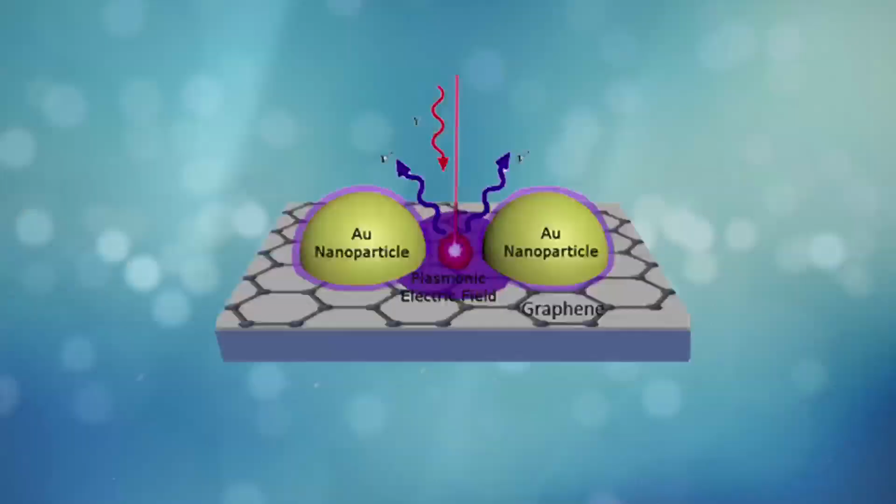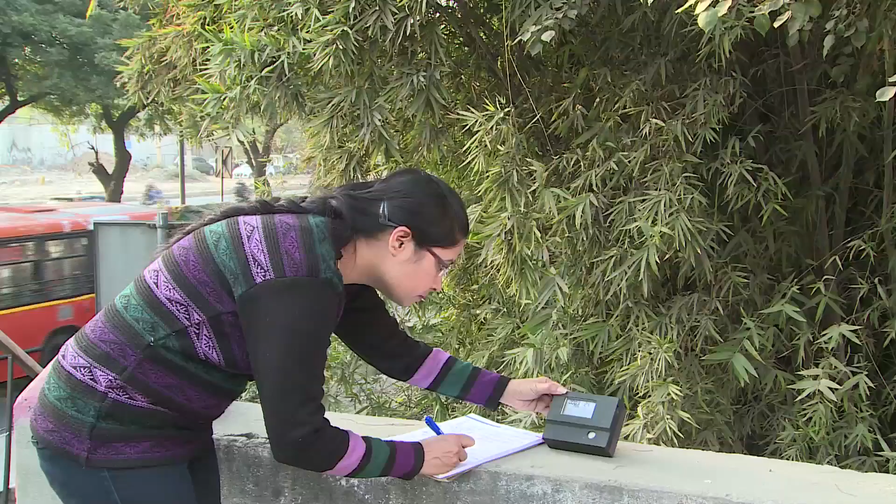The division has started working in the area of nanotechnology through a major project on development of surface-enhanced Raman scattering (SERS)-based sensors for the detection of environmental pollutants. These cost-effective, sensitive and selective paper-based SERS sensors quantify ground-level air pollutants and even monitor toxic substances such as benzene, toluene, carbon monoxide, polyaromatic hydrocarbons and heavy metals.

The Information, Liaison and Training Division at CSIR-CRRI acts as a nodal point between the Institute and outside agencies for promotion, utilization and implementation of the Institute's knowledge base. The main activities of the division include dissemination of information, development of human resource, organizing specialized training programs for highway and transportation engineers, and also the marketing of the Institute's knowledge base.

Dissemination of R&D results is promoted through a variety of channels like publications, annual reports, newsletters, and participation in technical exhibitions.

Training is an important activity of this division, and CSIR-CRRI offers several refresher training and development programs designed to suit the requirement of different target groups. More than 25,000 in-service highway engineers have been trained so far by the Institute. It maintains an active liaison with various highway research organizations, both in India and abroad.

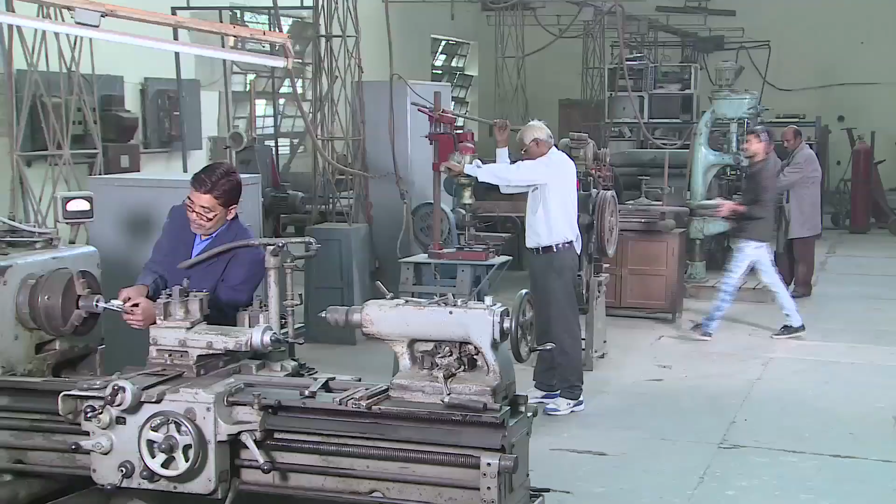The Institute has a well-equipped workshop to provide technical support to all R&D divisions, keeping pace with modern technology and to keep researchers up to date with global developments.

The Institute has created a high-tech computer center armed with all contemporary capabilities to provide information to researchers at the Institute. The well-maintained library is equipped to provide all support to researchers, which houses more than 80,000 books and journals on different subjects.

The Project Monitoring and Evaluation (PME) division provides able support for monitoring and assessment of external and in-house projects. Administration, finance, accounts, store and purchase provide ample support to researchers to carry out outstanding research work at the Institute.

There are several milestones fixed for the next 5 years. We are creating national facilities for testing of expansion joints for road bridges, and I am sure that this facility will be extremely useful to the nation as well as to CRRI.

Our scientists are working on use of industrial waste in road construction. This is also a major problem in the country where industries are finding it difficult to dispose of industrial waste.

Our scientists are also working on low-cost indigenous equipment like mobile road safety assessment system, network survey vehicle, drone-based technology for assessment of bridges. The cold mix technology, which was developed for low-volume roads, is being upgraded to high-volume roads. We wish to develop a highway safety manual also, in line with the Indian Highway Capacity Manual.

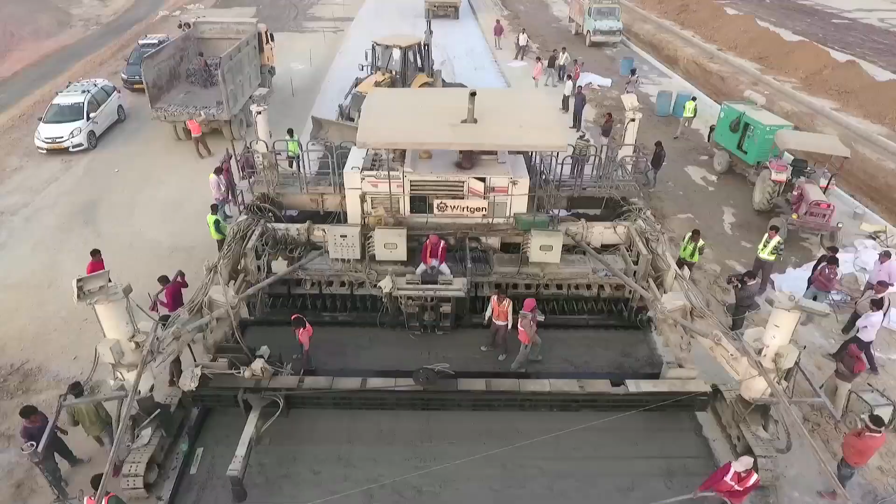Tirelessly engaged in research and development activities, ranging from material behavior to hazard mitigation, from pavement to bridges, from road safety to transportation planning to environmental sciences.